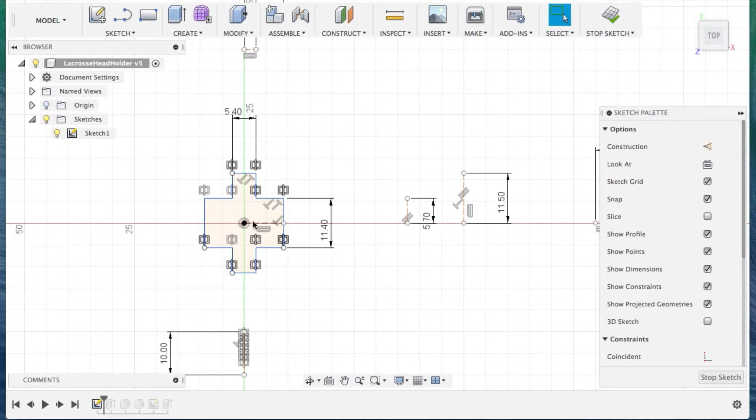Once all our guides were in there, we drew this shape here as kind of like a squiggly line, and that's our base from which we mirror on this axis here and this axis here so that we can create our fully closed shape, which will eventually become our extrusion profile. Now, there are multiple ways that you could do this. You could also have done it with two rectangles and then trimmed all the bits that cross over out. There's 1,000 ways to do anything in CAD, and it's all up to personal preference, essentially.

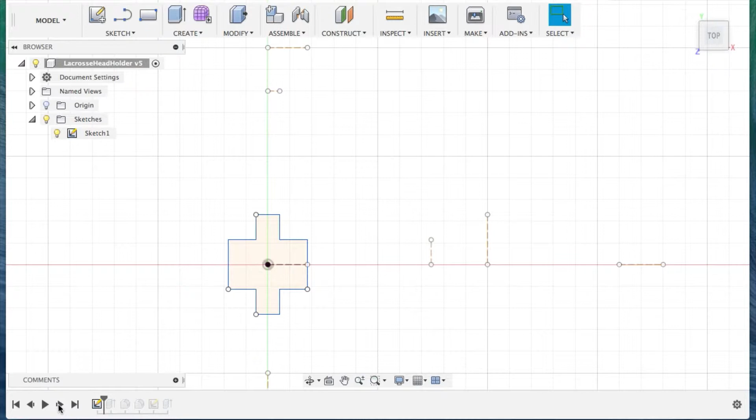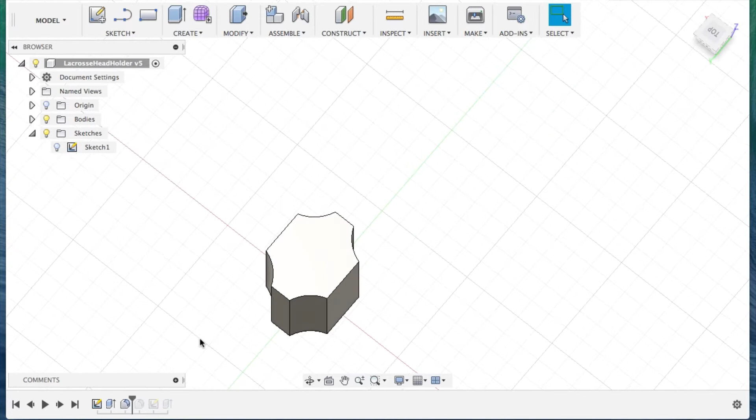Now, next step is to extrude our profile. We chose to go with 30 millimeters distance, which is double what we measured from the top of the shaft to the center hole. Next step is to smooth off some of the hard corners, make it match the shape a little bit more, and just generally get rid of any hard edges that might catch when we try and install it in the shaft. The next step is to create a sketch to build our screw hole.

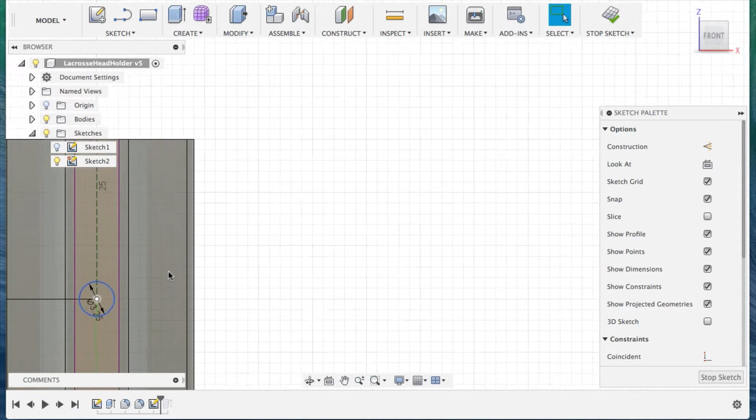So we will place it on this plane here, and then if we open it up, you can see we've built some reference geometry. So we have our 15 millimeter measurement from the top. We've also aligned it with the midpoint of this plane so that we can get our circle right smack dab in the middle. And we made it 3.25 millimeters, which we measured as the minor diameter of the screw. So if you look at the screw from the side, you can see there's kind of like peaks and troughs. So we measure trough to trough, or the root of the screw thread, and that was 3.25 millimeters.

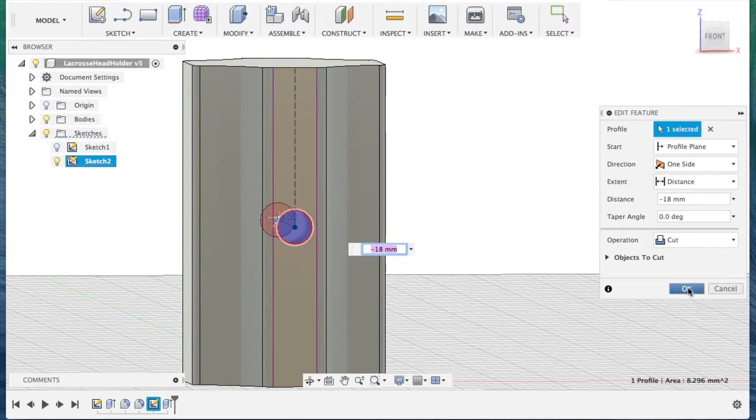Sizing to the minor diameter of the screw thread enables the thread itself to bite into the material that we're going to print this out of, so then we get better hold with our finished product. With the hole cut, all that's left to do is slice it up and get it on the printer.

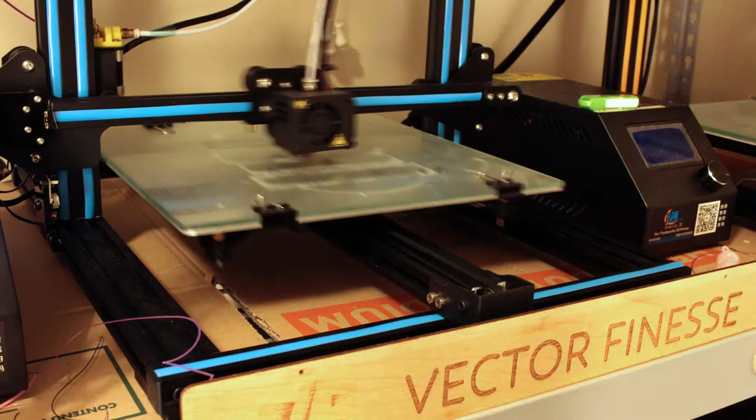Assembly is pretty simple. We take the piece that we've printed, make sure the holes are facing the same way as the holes in the shaft, slide it in top, place the head on top, tip it over, give it a bit of a shake so that everything slides into place and the holes are aligned, and then pop the screw in and tighten her down.

The biggest thing I noticed putting it back together is you don't feel like you're going to strip the shaft out. You can tighten it down really snug, more snug than you could before, without it feeling like it's gonna just strip out on you, and then you're gonna have to put an even bigger screw in later. With it all snug down, it's really, really tight, and there's no chance of this head flying off anytime soon.